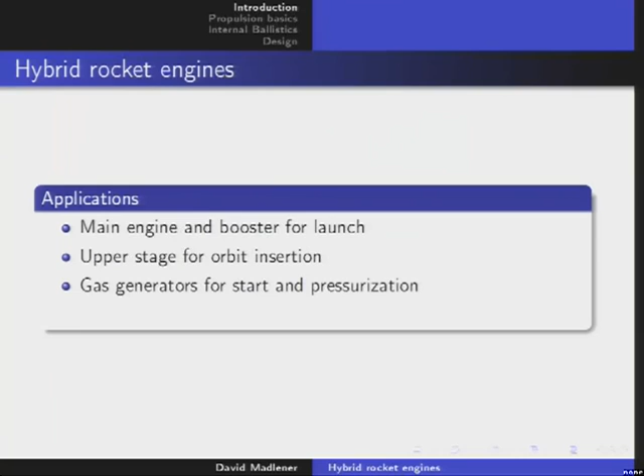So, hybrid rocket engines, what are the applications? It can be used as a main engine or booster for launch. A company named AMROC developed a working launch system in the 90s, but sadly it went bankrupt, so we never saw it flying. In principle, this is a proven technology and could be used for space launch, for upper stage, or for orbit insertion. It is often used as a gas generator, to start another engine or pressurize tanks, and sometimes even as an extinguisher. Very importantly today, in the military or for amateurs, for unmanned aerial vehicles, it is used as a sustainer engine for drones because it has very long burn time and you can throttle the engine.

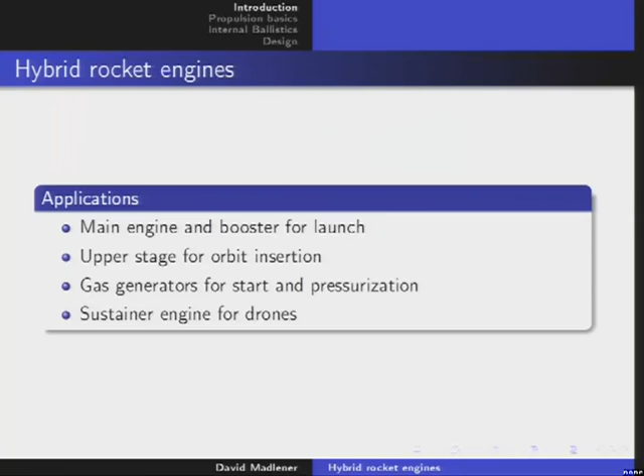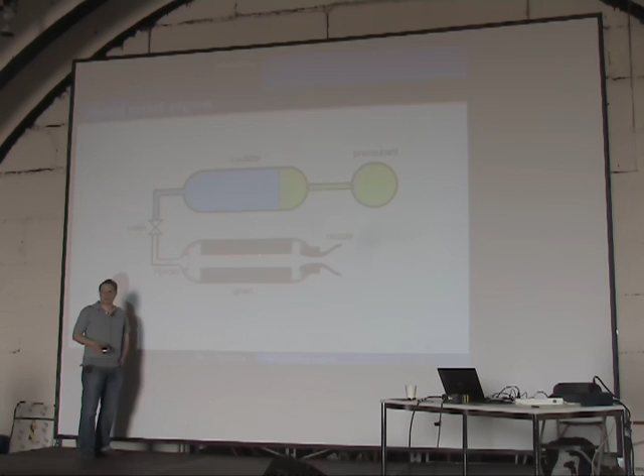The valve has to work at cryogenic temperatures if you are using cryogenic fluid, so this is the difficult part. If anybody remembers, Copenhagen Suborbitals launched their Heat 1X this summer, and last summer they tried, and this was the main problem - the valve didn't open because it was frozen. So this happened to us too.

Then we have the oxidizer container, normally a fluid like liquid oxygen or something like that, and then we have the pressurant. So if we build an engine, we have to feed the liquid into the burning chamber at a certain pressure - normally the higher the better. The problem is, of course, that you have to somehow put pressure on this liquid, and there are two ways to do that: you can use a pump, or you can pressurize it by a gas. This is very simple. If you use a pump, the pump assembly would be here, and it would be the most complex thing, so amateurs normally tend to use normal pressurization by gas.

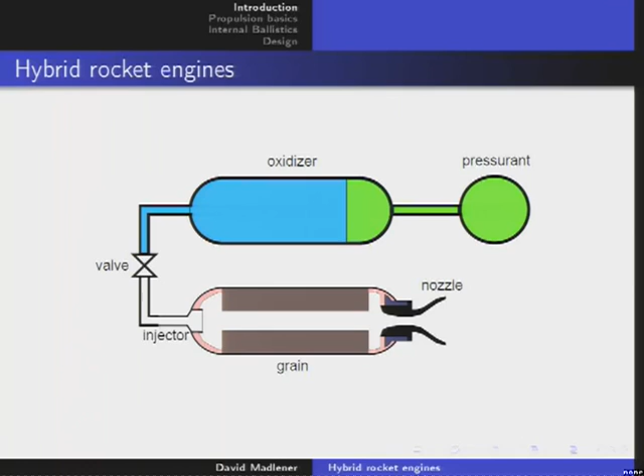Okay, that's the principle. So what are the pros of this design?

There are many pros. First, it's inherently safe - that's something really nice. Hybrid rocket engines cannot explode by itself, like, for example, solid engines, and they don't do hard starts like liquid engines, and they don't burn up in flames and devastate everything, your test stand and even people, if you use the right oxidizer.

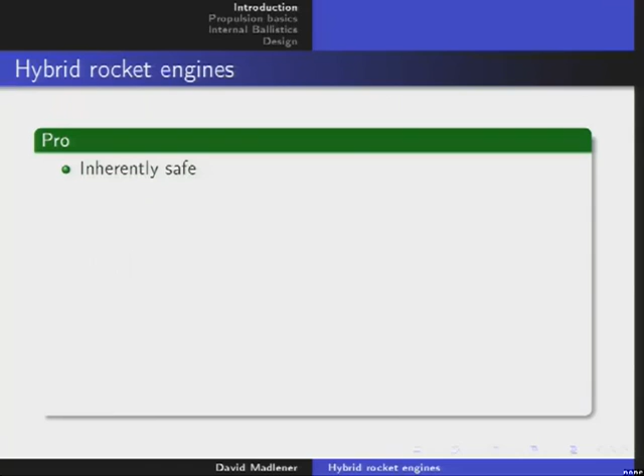There was an accident with - what's the name - Scaled Composites, where they used nitrous oxide, which is a monopropellant, and they did something wrong. There was some cavitation and it exploded, and I think 2 or 3 people died. But normally hybrids are very safe.

It's environmentally clean if you don't add any strange metals like beryllium or something like that to the mix. It's a proven technology - as I said, there were applications trying to make a launcher, and it was working. And it has been researched since the 1930s, so it's nothing new.

The grain is very robust, so it doesn't matter if there are cracks or bubbles or something inside, like for a solid rocket engine, where we have to take very much care looking at the structure of the grain, let's say with X-ray or so. In hybrid engines, the grain could have bubbles or cracks, and it doesn't even matter. So that's the feature of why it's inherently safe.

It has medium ISP, so between 150 and 300. You can go a little bit beyond that limit, but you have to use very exotic oxidizers and fuels.

It has easy throttling. You only have to throttle one liquid. As in the case of bipropellants, if you want to throttle, then you have to change 2 liquid streams. It's much more complicated than just one.

You can shut down and restart the engines. It's very easy to do, as compared to solid engines that are very difficult to restart and shut down. And it has reduced complexity and low cost compared to bipropellant engines because the feed system only has to transport one liquid, and you don't need mixing aggregators to mix the 2 propellants.

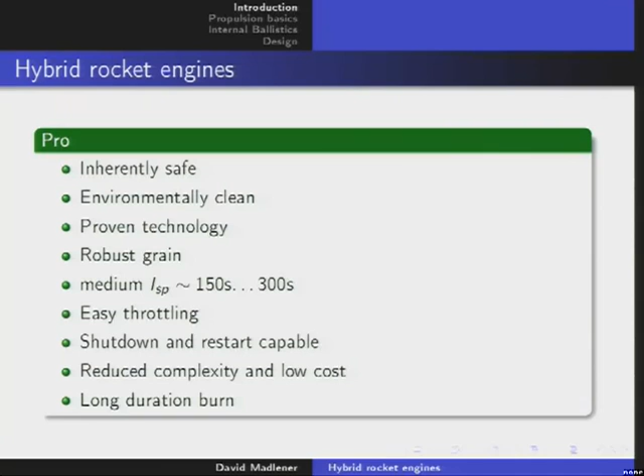So there are, of course, some drawbacks. If these drawbacks weren't there, they would be using hybrid engines now. But they don't. So why don't they use it? Well, there's one problem: low regression rates, that in turn brings the very long duration burns.

But if you don't want that, if you want a very short burning time, so a lot of thrust, then you have a problem. But you can counteract it. One way is to use multiports. The second way is to use special fuels that have a very high regression rate because they have low viscosity when they melt, like paraffin.

So there are additional effects that transport the fuel into the burning chamber.

It has low bulk density. That means that a hybrid rocket engine is normally very large. You cannot build them as small as bipropellants, maybe just that small. So they are always 1-2 meters long because they need the mixing time. That's due to the process of burning.

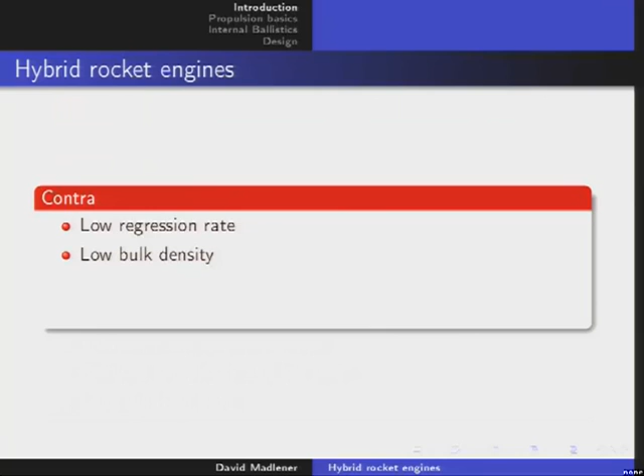And they have normally a low combustion efficiency, so a few percent below bipropellants, but they are better than solid rocket engines. So to improve the efficiency, you have to add certain mixing elements like diaphragms to make something like an afterburning by producing vorticity. And this, of course, adds additional weight to the system, so you have to build it bigger.

And another problem is the shifting O/F ratio. This is a ratio between oxidizer and fuel, because as the port increases in size, everything changes. The working point of the engine changes, and you have to counteract it by controlling. But with today's electronics, this shouldn't be a problem.

So there are some drawbacks, and they are mainly used against the hybrids. That's the real reason why they are not in use, these 4 points. So if you want to make a running system, you have to address these 4 points.

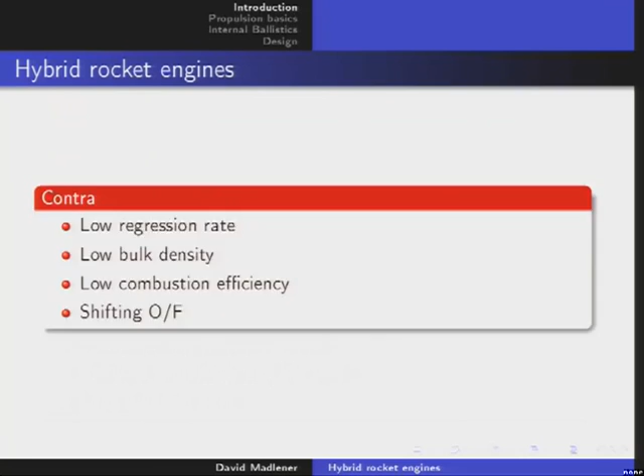So let's look at the fuels, what is used normally. You can use any polymer, but one of the first, when they were available, was just rubber, polybutadiene. Today mostly HTPB, hydroxy-terminated polybutadiene, is used, which is just a more viscous, faster burning rubber. But you could just as well use polyethylene.

We use that too. Amateurs like to use that. The problem with polyethylene is that when it melts, it expands, so it deforms and everything.

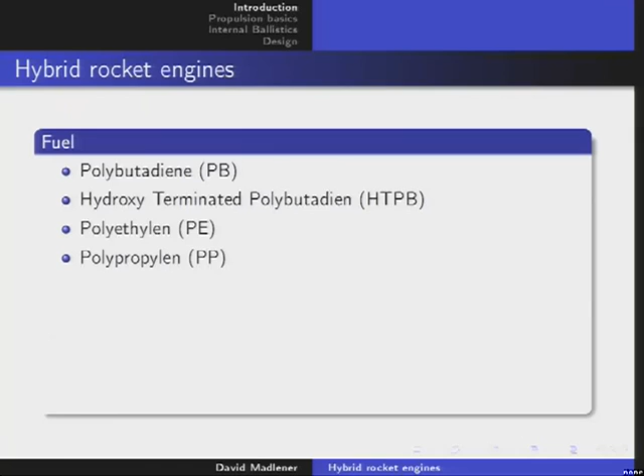Then you could, of course, use polypropylene, which is nearly the same. What's very nice is to use PMMA, polymethyl methacrylate, which is transparent, so you can watch the burn while it's working, and estimate parameters in the burning chamber just by optical inspection.

Then what we used was polyurethane, nasty stuff, but very easy to process. Then some amateurs use PVC, polyvinyl chloride, which is really nasty because it produces chlorine exhaust, but is readily available in every hardware store.

And then again, a very, very good propellant that some guys in our group investigated is paraffin, or you can use very long alkanes, asphalt for example. This has a very high regression rate, so you can get to very high thrust even using one port, reducing the complexity of the engine.

A very exotic fuel is pure lithium. There was a program in the 60s, beginning of the 70s, where they used a pure lithium grain together with FLOX, and it achieved, I think, a vacuum ISP of 380, so nearly that of a good bipropellant.

So oxidizer, what is normally used? Well, we used liquid oxygen, and it's, in my opinion, the best oxidizer there is in the world. But there are other opinions.

So you can use gaseous oxygen. Of course, this is only for test stands because the density is too low for the engine to work in a real application. Most amateurs use nitrous oxide.

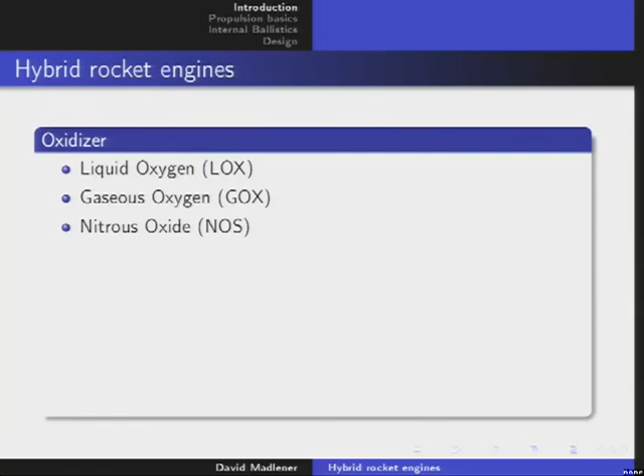Then there is a very interesting substance called red fuming nitric acid that you can only use with a bunny suit - a moon suit - otherwise you get burnt. You have to use a gas mask. But otherwise, it is a very benign substance, so it doesn't explode by itself.

It just burns everything in contact. And this one produces nitrous gases, so it's red fuming - it looks like it's directly coming from hell. And this one is not so dangerous in the sense that it doesn't produce so much fumes, but this thing corrodes everything. So you put it in anything that's not specially suited, like with Teflon or so, and it will corrode everything.

So hydrogen peroxide is a very interesting oxidizer. True - the problem with hydrogen peroxide is that it has a lower specific impulse because it produces water in the process. But it is very, very nice as a monopropellant, and there are guys that use hydrogen peroxide for hybrids.

Then there is dinitrogen tetroxide. This is normally used for military applications. It's a storable compound, a liquid gas, like nitrous oxide. It's very similar - it's just adding two agents together, and it's what makes the red fuming nitric acid red, essentially.

So then we have liquid fluorine, which is something very, very, very nasty, and you don't want to work with it, but they did. And even worse, liquid fluorine plus oxygen, called FLOX. And as I told you, this FLOX was used with lithium to produce a hybrid engine that achieved about 380 seconds in the 1970s. So there are surely a lot of other oxidizers, but these are the best.

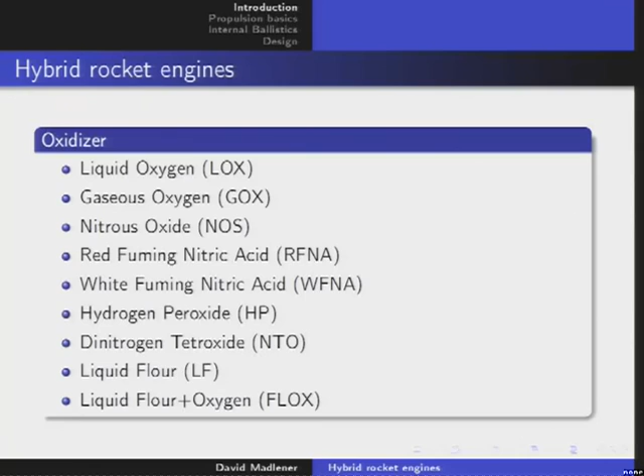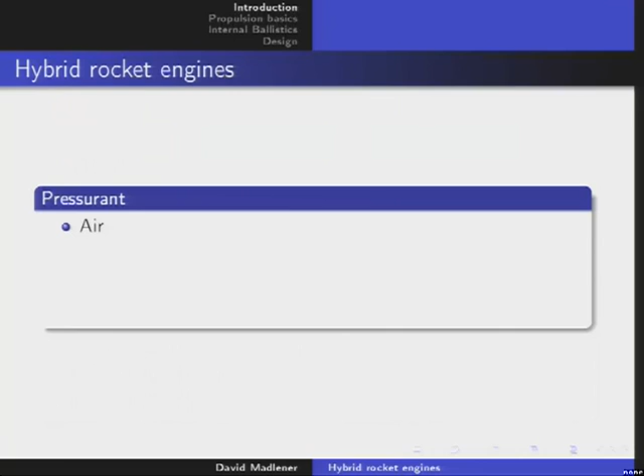Then as pressurant, there's not so much choice. Normally you can use just air, compressed air. The problem is that compressed air contains oxygen, and if you let it flow through a feed line, there can be some inhomogeneity, some crack or something like that, and you can have an adiabatic shock. At that point, it heats up and it just ignites, and then you have a nice burning facility.

So it's better to use nitrogen. It's totally inert, it's very cheap. The problem is if you work with cryogenic oxidizers like LOX, the nitrogen will go to the liquid phase, so you have to put a lot of nitrogen in it.

Then you could use helium, which is normally the best choice. The problem with helium is it's very expensive and it goes through everything, so you cannot store it for a long time. You should just buy it and use it up in a short cycle, otherwise maybe only half of the helium you bought is left.

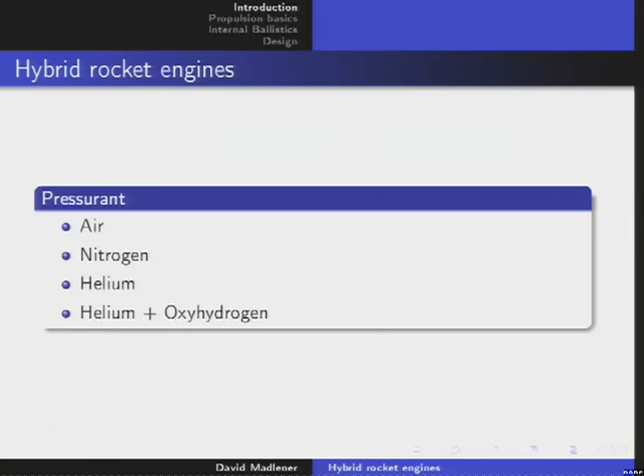And what's very interesting, there are people that use helium together with oxyhydrogen. Okay, oxyhydrogen as a pressurant is somehow crazy, yes? But there are guys in Switzerland, SPL, and they just take oxyhydrogen in a concentration that isn't explosive, so very low concentration, and then they take the helium and expand it through a catalyzer with the oxyhydrogen, so this reaction takes place, produces water and a lot of heat, so the helium is heated and you need less helium than just pressurizing it with room temperature helium.

Okay, so let's talk about the grains. Normally you just use a circular port. This is the simplest port, just a hole, and it's like an inverse flame inside, like a candle, but burning from inside instead of using some string.

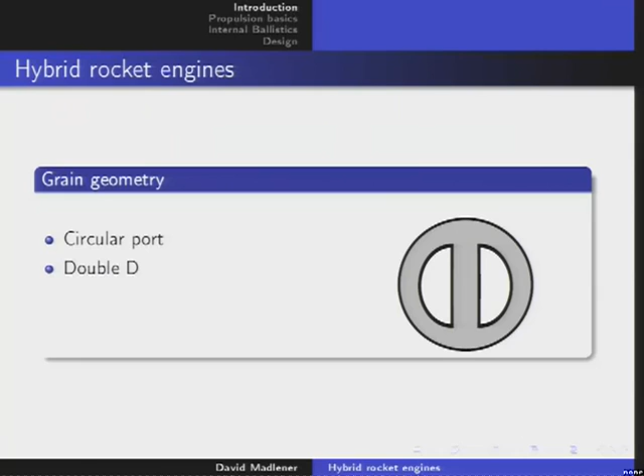And then this is the double port design, typical, so the double D. If you want to have higher thrust, you have to add ports - of course this makes the injector more complicated. And then the 4-port, and of course the so-called wagon wheel.

This was the design AMROC used for their launching vehicle. The problem with these wagon wheels is when they burn up, of course these hollow regions expand until they touch, and then you are left with a web. At this point, you have to shut off the engine, otherwise the web itself will start to deteriorate, to burn up.

Small pieces will go to your nozzle at a speed of approximately Mach 1, about 1,000 meters per second, and will destroy the throat of the nozzle, thereby changing the flow and the working point, deviating the rocket. So this is not a nice thing to try. These are the problems you have if you use fuel webs for multi-ports.

So now let's talk a little bit about propulsion basics. This is very basic stuff, and some of you may have heard it already.

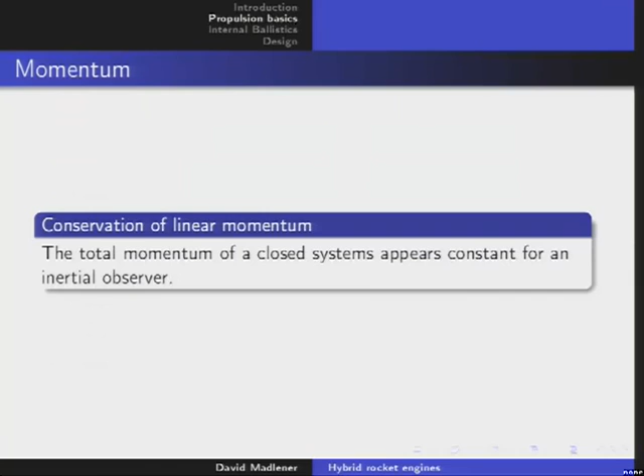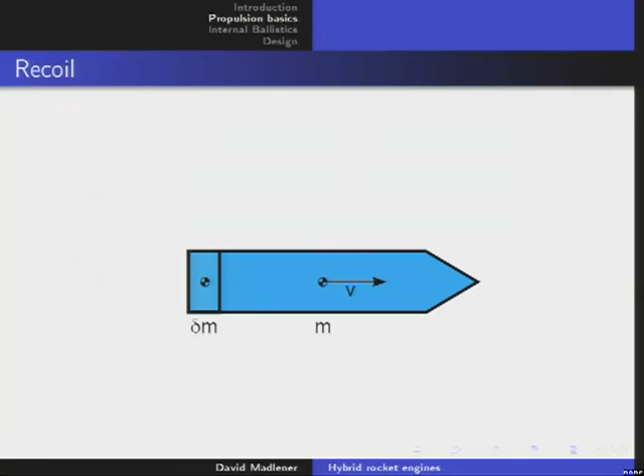When we look at a rocket, what we really use every time is the so-called conservation of linear momentum. For an inertial observer looking at a system where no external forces are working, this system has constant momentum. If you look at a rocket in flight with velocity v, and we have two masses, the mass of the rocket and some small mass delta m ejected in a short time frame delta t, then the momentum before the ejection and after the ejection has to be equal.

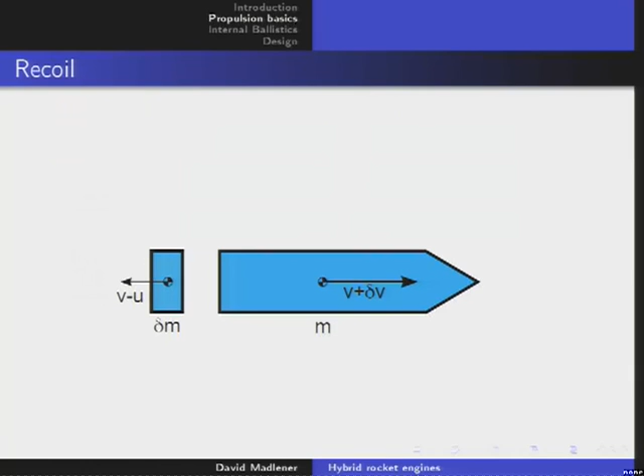So you can write down a little equation. On the left side you have the momentum before the ejection, and on the right side the momentum after. If you look at it rightly, you get to this little equation. You divide it by the time needed, delta t, and then integrate it. On the right side, we have the time derivative of velocity integrated, which gives us the difference in velocity between the start and end of the burn.

Here we have something more difficult - this is the so-called logarithmic derivation. When we integrate, we get the natural logarithm in front, and we arrive at the celebrated Tsiolkovsky formula, which is the most important formula for mission planning.

For every mission you want to accomplish, there's a certain change in velocity the rocket has to achieve to perform the mission, and it's called delta V. As Tsiolkovsky found out in the 1800s-1900s, delta V is proportional to the so-called effective exhaust velocity - the velocity at which you propel the fuel, the burn gases, out of the rocket behind you. And then there's the natural logarithm of the mass ratio.

So the idea is first to propel the exhaust gases as fast as possible away from the rocket, and the second thing is, at the end of the burn, to be as light as possible, so you get a very high mass ratio.

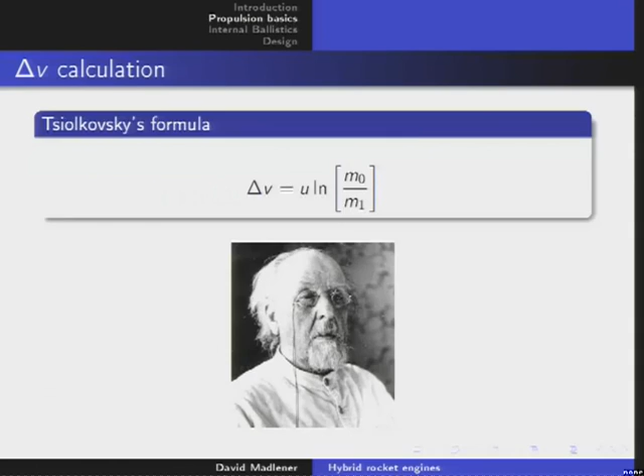Okay, let's look at delta V's. If you don't know about delta V's - where we want to go is to space. So we are on Earth, and the first thing to go is always low Earth orbit. We need a lot of delta V to go there, about 9 to 10 kilometers per second. Knowing the effective exhaust velocity of rocket engines is in the order of 2 to 4 kilometers per second, you have to achieve a very high mass ratio to get to this 10.

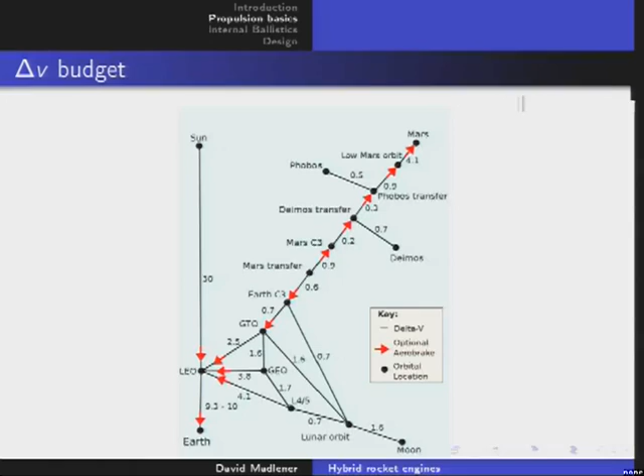Once you are in low Earth orbit, all the numbers are much, much smaller. For example, if you want to go to the moon through a geotransfer orbit, you need 2.5 kilometers per second, and then again from GTO to lunar orbit, 1.6 - so in total, 4.1 kilometers per second. So the rest of the way to the moon, the remaining 380,000 kilometers, only needs less than half of the delta V you needed just to get to 150, 200 kilometers.

So this first step is always crucial. The rest is easier to achieve. Once you are in lunar orbit, you can descend to the moon with 1.6 kilometers per second, which is very moderate - you can do it with a solid engine even.

Then if you want to go up from the moon, 1.6, and let's say we want to go to Mars, we need about 3 to 4 kilometers per second - the rest could be done by aerobraking. So to go from the moon to Mars is about 1/3 cheaper than going from Earth just to low Earth orbit. So it would be logical to first build a moon base, construct the spaceship there, and then go to Mars. It would be much faster, and the ship could be much bigger and carry much more. And of course, they're planning on it.

The Chinese, hopefully. So this is the major idea they had. It's called staging, looking at these delta V's.

You can calculate this just with very simple algebra, what you need from the masses of the planets and the moon. And if you look at your normal exhaust velocity, you see that normally you cannot reach the mass ratio necessary of about 100 or so to go to the moon.

So it would not be possible to build one stage rockets to go to the moon. But by staging them, like in the Saturn V project, you can just effectively add the logarithms, and you get at least the mass ratio of the end configuration compared to the start configuration.

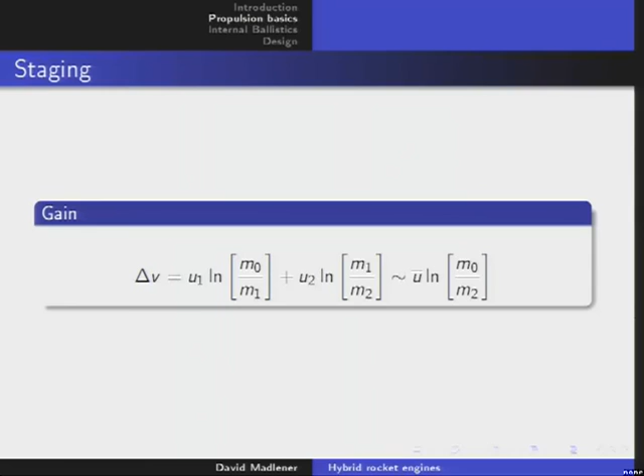Okay, let's talk a little bit of thermodynamics. This is necessary because I want to show you some formulas that contain a lot of signs that are very difficult to understand if you haven't seen them anywhere else.

So there are two laws in thermodynamics. The first law is you can't win. And the second law is you shouldn't even try.

So the first law is about the inner energy that can only change by adding heat to a system or work, or extracting it to reduce the inner energy. And the second law states there is some strange state variable called the entropy, and it's somehow connected to the heat flow at reversible process.

Okay, so energy and temperature. You may have heard about the Boltzmann constant. Every physicist knows about it. It's a very small number, 10 to the power of minus 23.

And what it essentially says is, if you have a molecule or an atom at a certain temperature, let's say at 300 Kelvin, room temperature, then you can calculate with this constant the mean energy per degree of freedom.

So degree of freedom means the way a molecule can move, let's say in direction of X or Y or Z, or it can rotate around an axis. So for example, for a diatomic molecule, you would have 5 degrees of freedom. So you could calculate that one single molecule would have in the mean 5/2 kBT.

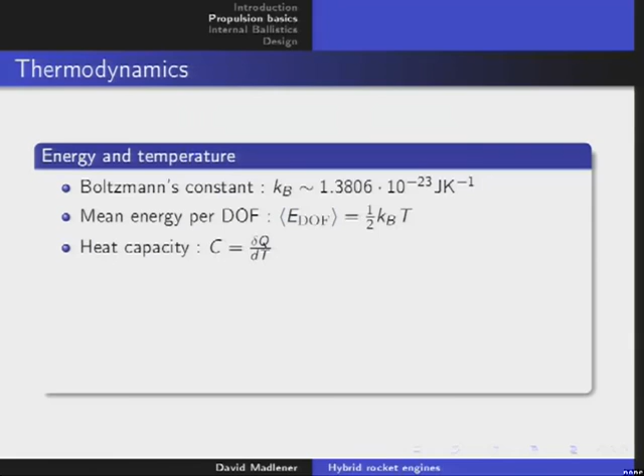So then there's another notion, very important: heat capacity. This is just if you take any system, let's say this glass of water, and you want to improve its temperature, then you have to put some energy in it. And the heat capacity just says how many joules you have to put in to increase the temperature by 1 Kelvin. That's heat capacity.

So if you do it by constant volume, like for example doing it in a cylinder, then it's the heat capacity at constant volume. There's a very nice entity called enthalpy, which is just a Legendre transform of the inner energy, and this leads us to the heat capacity at constant pressure.

So this is something that normally takes place in our environment. If you heat something, it always happens at ambient pressure, at air pressure, so it's a constant pressure. So what you normally measure is the heat capacity at constant pressure.

And there is something that's called the adiabatic index, gamma, or sometimes called kappa in the formulas, and it's just a ratio of these two heats. And it's a number that is close to 1, always a little bit higher, so between 1 and 1.666.

So this is a number that is always used in rocketry equations. Don't be alarmed, it's a very simple number to understand. It's just some small number between 1 and 1.666 that describes the constituents of the gas that is exhausted.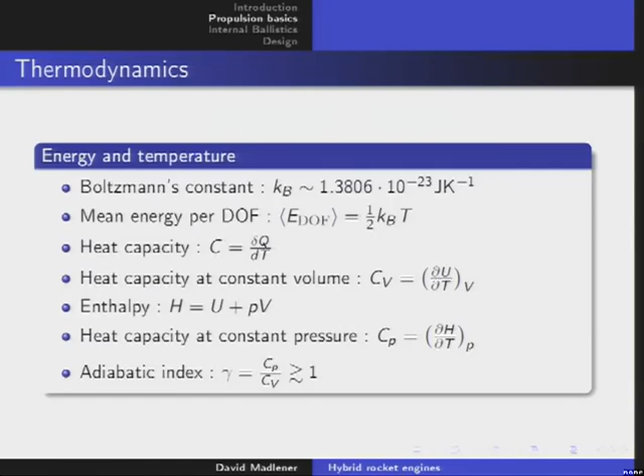So now some chemistry, molar and specific quantities. There's Avogadro's number, which is just the chemist's way of saying a dozen. Yes, a dozen is a small number, 12, and Avogadro's number is just a larger number, but it has to do with 12, because per definition, the Avogadro number is the number of atoms in the isotope C12 if you have 12 grams of it.

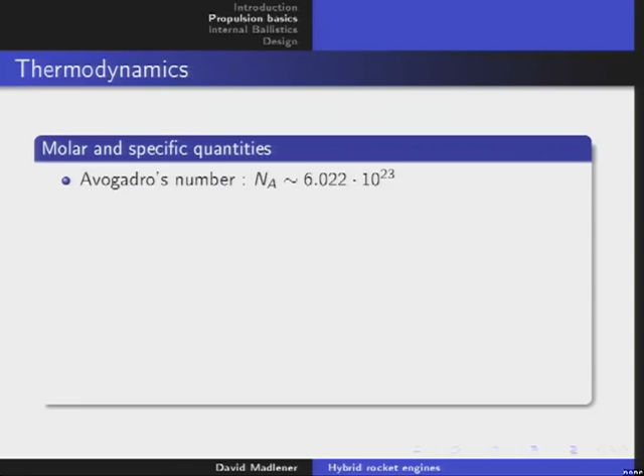Very funny. So this is the number, very, very high, and if you multiply our Boltzmann constant that has nearly the same order of magnitude, just in the reverse order, you get to a small number, about 8, and we call that the universal gas constant. So just remember, R is in the vicinity of 8.

Then we have the amount of substance, just taking all the molecules and dividing it by this number. Instead of saying I have 12 times 10 to the power of 23 molecules, you say I have 2 moles, just like when you have 24 eggs, you say I have 2 dozen.

Then you have the molecular weight, very important for the formulas that will come. It's just the weight that 1 mole of the substance has. You take 1 molecule, look at its weight, multiply it with Avogadro's number, and you get some number in the region of grams. For example, water, made of oxygen and 2 hydrogens, is 16 plus 2, so 18 grams per mole. So if you have 18 grams of water, there are about 6 times 10 to the power of 23 molecules in it.

So the molar concentration is just how many moles in a liter, then the number concentration is how many molecules in a liter, the mass density is how many mass per liter, and the specific heat capacity is just taking the heat capacity of the system and dividing it by its mass.

Okay, so then something very important, the so-called velocity of sound. It's a very simple formula, and here we see for the first time the adiabatic index. For example, if you want to calculate the velocity of sound in air, you put in the temperature we have now, let's say around 300 Kelvin, divide by the molar mass of air, which is in the order of 28 grams or so, multiply it by gamma of air, which is in the order of 1.4, multiply it with 8.314, and take the square root, and you get about 340 meters per second.

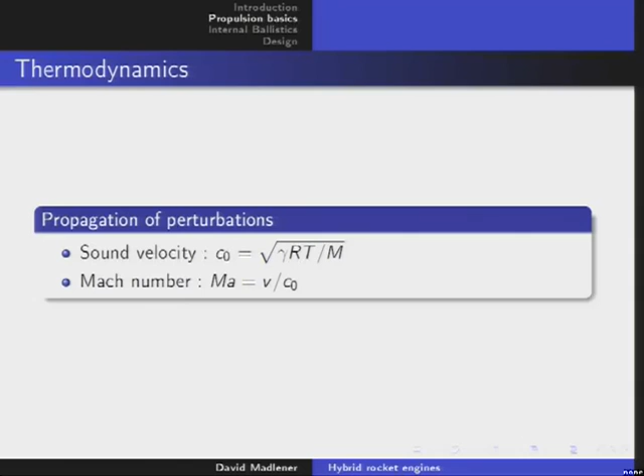Okay, let's talk about the ideal gas. I have a nice metaphor for it. Just imagine that you have n hooligans, and they are confined to a space V, and you make them angry with a temperature T.

Then they will exert a pressure on the environment. You can divide it by V to get the number density of the hooligans, or divide it by Avogadro's number to get something chemists like, the molarity, or divide by V to get the molar concentration.

What is normally used in rocketry is this equation. If you come around this equation, it's always the ideal gas, all the same. In this case, it's the density rho, and the molecular weight m is now introduced.

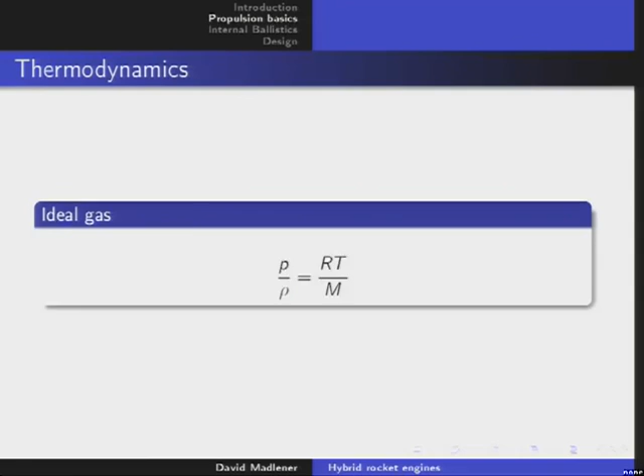So what are the properties of ideal gases? Well, we can calculate the adiabatic index because it's just given by the number of degrees of freedom plus 2, divided by the number of degrees of freedom. So if you have, for example, a diatomic gas, like in air, nitrogen and oxygen mostly, then the number of degrees of freedom is 5, 3 for translation and 2 for rotation. So 5 plus 2 is 7, divided by 5 is 1.4. It's that easy for an ideal gas.

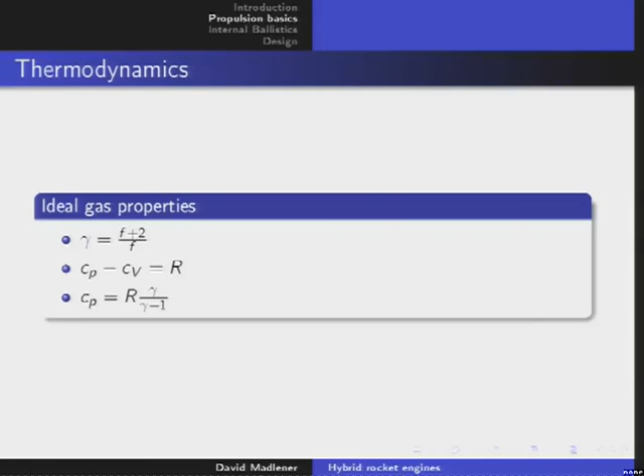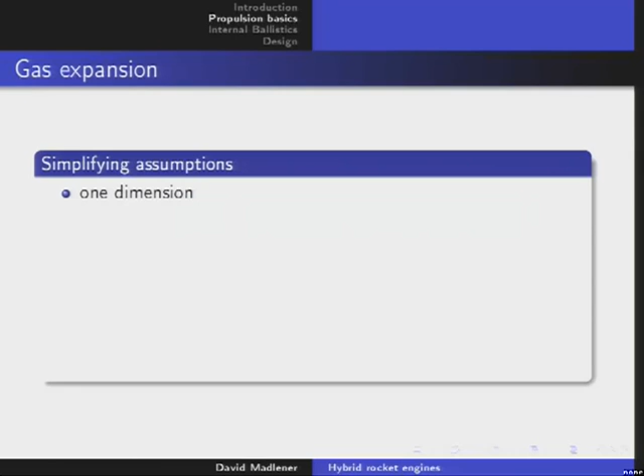Then the difference between the two heats at constant pressure and constant volume is just R, 8.314. And you can even directly calculate Cp. That's very important because if we do gas expansion, which we're interested in with the nozzle, we can simplify things and get exact analytical expressions that we can just calculate to get the properties of the engine.

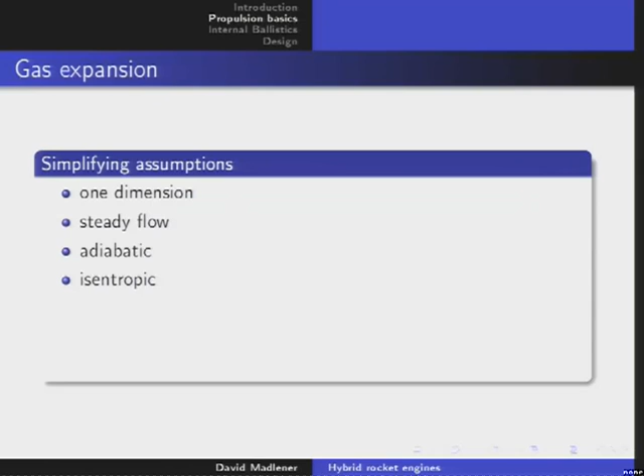So the simplifying assumptions are one-dimensional flow, steady flow with no change over time, adiabatic (no flow of heat), isentropic, and ideal gas. It's done only with volume work, so the gas expands and works against the environment, and there are no significant changes in potential energy because our engines are normally so small that they are negligible.

So if you have, for example, a foil, you could calculate the temperature at the stagnation point, or more interesting, for rockets, you can calculate the temperature at the tip of the rocket. You can see if V gets very high, let's say Mach 3 or higher, its temperature goes beyond 500 Kelvin, 600, 700, 800 Kelvin - so you cannot build tips out of, for example, aluminum. It will just melt away, okay?

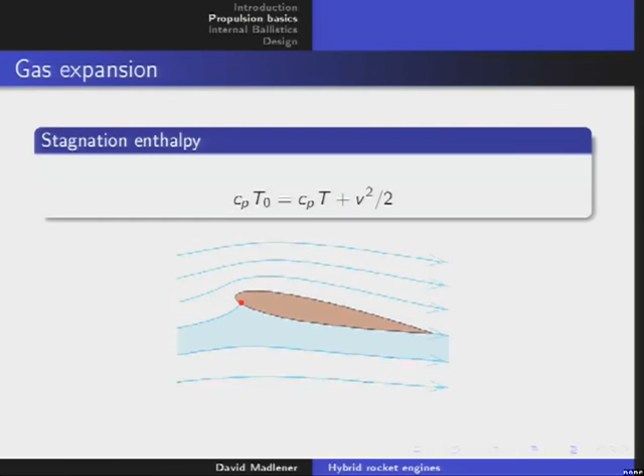So now, to the so-called de Laval nozzle, the convergent-divergent nozzle. This is the one piece of engineering that produces the most power on Earth. With this simple device, every normal power plant produces electricity, okay? By expanding hot steam to very high speeds, you turn the turbine and then you produce electricity. And of course, it is used in rockets, and as you may know, rockets are the most sophisticated and most powerful engines ever built.

So what happens is that hot gas enters the convergent section, then it speeds up, and exactly at the throat, it reaches Mach 1, the local velocity of sound. After exiting the throat region, it even accelerates more and achieves supersonic velocity, maybe Mach 4 or 5 or so. And you have the effective acceleration of the gas.

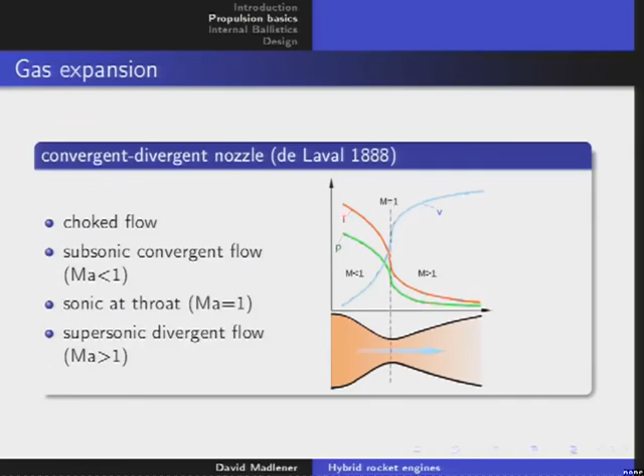So the thrust itself is now calculated from two terms. The first term, m-dot times Ve, is the outflow, the rate at which momentum is exchanged by pushing away the mass, the propellant, the gases. And the second term is due to the ambient pressure and the pressure at the exit of the nozzle - that's the difference, delta P, times the area of the exit of the nozzle. This is an additional term that cannot be omitted.

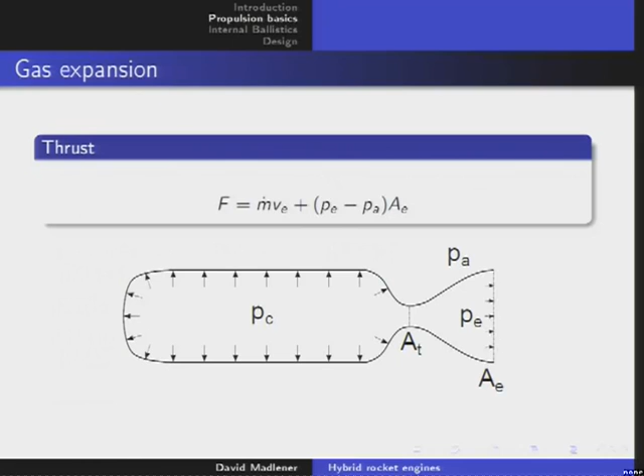And this term effectively changes the velocity of the gas from the exit to infinity. It may decelerate it or accelerate it depending on the pressures. So if the ambient pressure is higher than the nozzle exit pressure, what is normally the case at ground when you are testing, then the gases will be decelerated because they have to work against the ambient pressure. But if you are in space and vacuum, then they will accelerate, with the atoms pushing it forward, in a sense, without any nozzle walls to lead them.

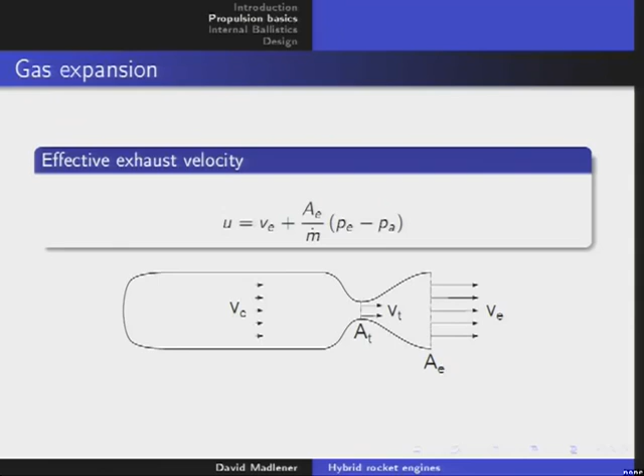So then, just by dividing by m-dot, you can calculate the effective exhaust velocity that we had in our Tsiolkovsky equation. Very importantly, with this effective exhaust velocity, you can calculate the specific impulse of the engine, the one number that defines how efficient the engine can accelerate the gas. It's measured in seconds, and it's normally in a range between 100 and 450 for the best engines.

So this is actually an equation from around 1850 or so, very old. It just describes the exit velocity depending on the stagnation temperature, the molecular weight of the gas, the universal gas constant, the adiabatic index, the pressure in the chamber, and the exit pressure at the nozzle. If you just enter everything, you get the velocity at the exit of the nozzle. And if you look at this formula, you see that it's proportional to the local speed of sound in the burning chamber - so the higher the speed of sound in the burning chamber, the better.

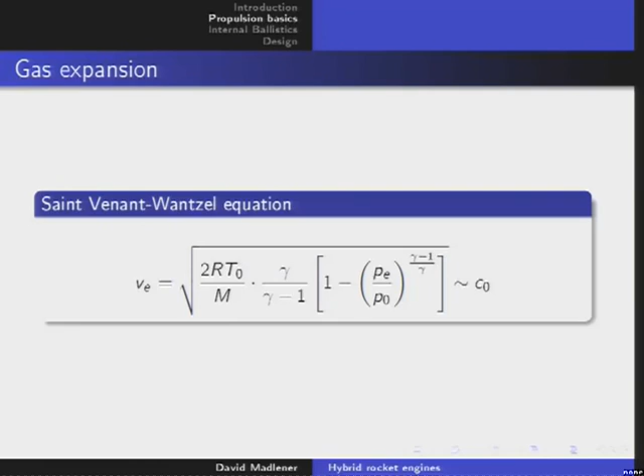So if you enter everything, you get this nice equation - I won't go into the details, this is just the thrust equation. You take this formula, put everything in, and you have an estimation of what the thrust of your engine will be. This is important, as we will see soon, that you know the thrust before testing.

Let's talk a little bit about hybrid combustion. The main feature of hybrids is the so-called diffusion flame. In solid fuel engines, the two propellants, oxidizer and fuel, are mixed so intimately that they directly react at the burning front, so there is normally not much reaction in the gas phase, except if we have metals. In bipropellant engines, you mix the two propellants by impinging them or something like that, and then they burn up in little droplets in flight.

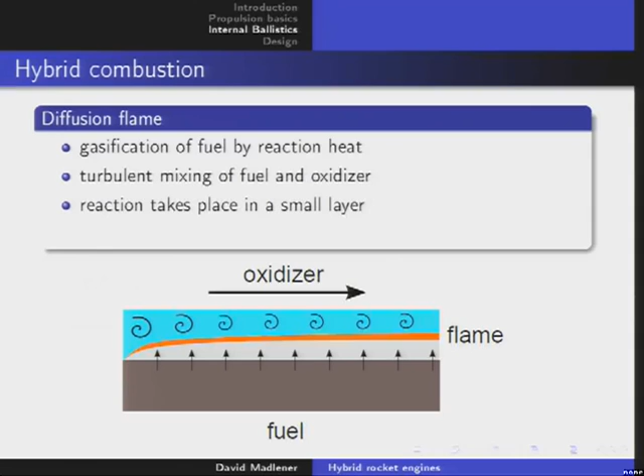In hybrid combustion, you have a diffusion flame, meaning the fuel is gasified during the reaction, and you have turbulent mixing between the two layers. This is fuel-rich, this is oxidizer-rich, and this is the flame front, so you have mixing between them. You have fuel blowing away from the wall, and due to the very high velocity of the oxidizer, you normally have a very high Reynolds number, so it's a turbulent flow, hopefully. The reaction takes place in a very small layer, the flame layer, where the two have the correct stoichiometric ratios - it's nature's way of burning things. If you look at a candle, you are looking at a diffusion flame. It's just the same thing in principle.

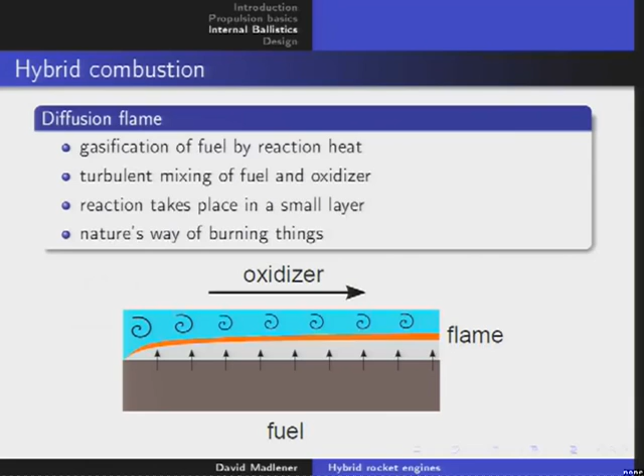Now to the burning rate, which is the dominating parameter to estimate the thrust. You have heat flowing from the flame front down to the fuel - we call it Q-dot for the wall, the heat that flows into the wall from the flame. On the right side of the equation, we have the amount of fuel that evaporates per second times its enthalpy of evaporation. So there's a certain kind of energy needed to transfer the fuel from the solid phase to a gaseous phase, or mainly first to a liquid phase and then to a gaseous phase.

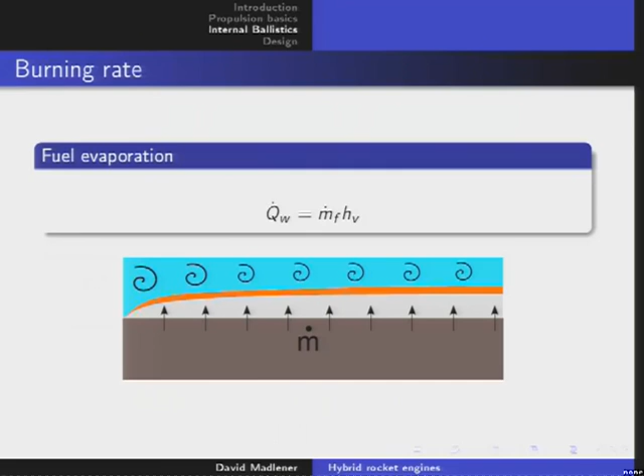This is the main feature why hybrids are inherently safe. Because if anything goes wrong, normally the pressure in the chamber drops, the flame goes out, and no more propellant will be evaporated. There is no intimate mixing of oxidizer and propellant possible like in bipropellant engines, where if there's some fault and these two things get together - like kerosene or hydrogen with LOX - then there's a very nice fireball, but only to watch from far away. If you're standing near it, that's it. But with hybrid engines, they may blow up, but then it's over - there will be no explosion.

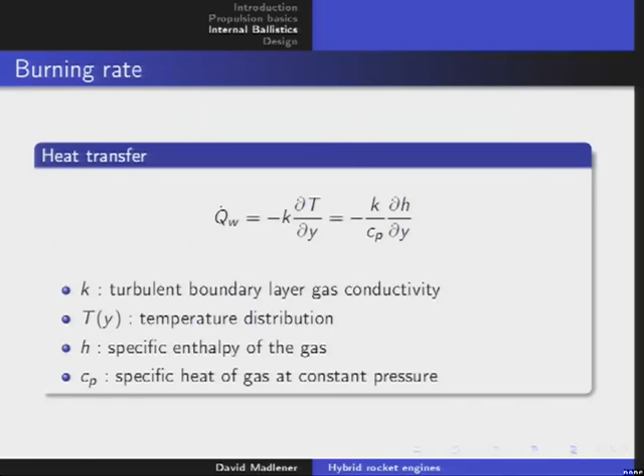The heat transfer is calculated by this equation, and it's very complicated - I won't go into the details. You have to look at the turbulent boundary layer, gas conductivity, the temperature distribution across the burning chamber. You have to know the specific enthalpy of the gas, so you have to do some thermochemistry to know what the combustion looks like, and of course you need the specific heat of these burning gases.

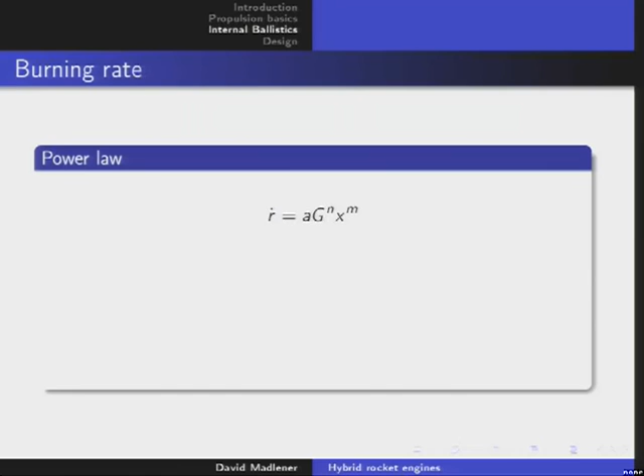When you do all that, you get this equation that describes how the burn rate goes. R-dot is the amount of length that the grain loses per second, so some millimeters per second, and it is calculated by a power law containing a regression coefficient. G is the total propellant mass flux rate along the port, and X is the distance along the port. So you need two exponents, n and m, on the order of 0.8 for n and minus 0.2 for m.

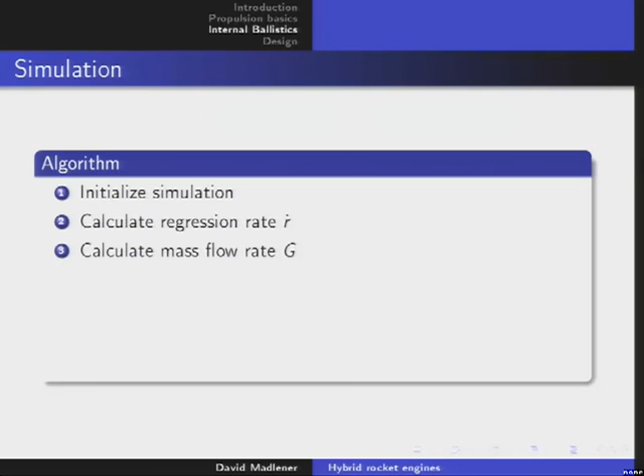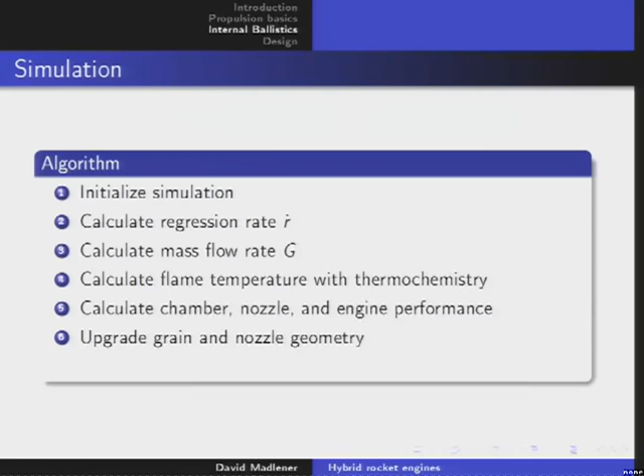Then you can simulate it - you initialize the simulation and calculate the regression rate with this formula. Then you calculate the mass flow rate by knowing how much oxidizer and fuel is now in the burning chamber. Then you calculate the temperature using thermochemistry, and from that calculate the change in the chamber, nozzle, and engine performance. And as you update, the grain is slightly changing, the port diameter is increasing, and the nozzle may be increasing too, because of ablation.

And if not all fuel has been spent, you just start over, and you repeat it until you have done the simulation. So that's how a simulation of a hybrid rocket motor is done.

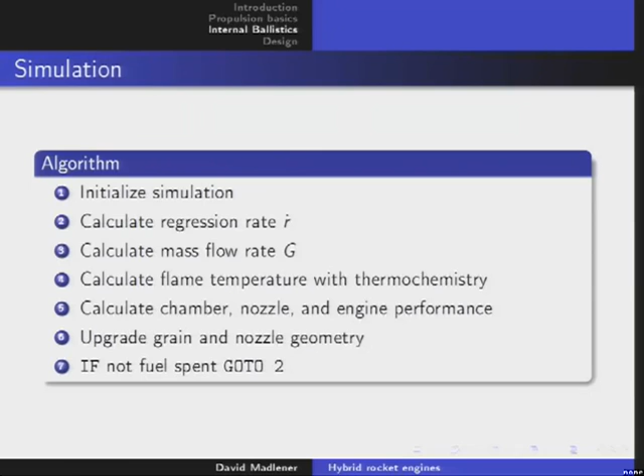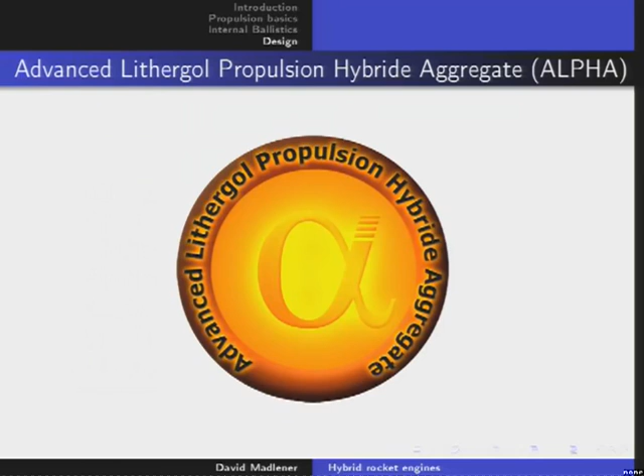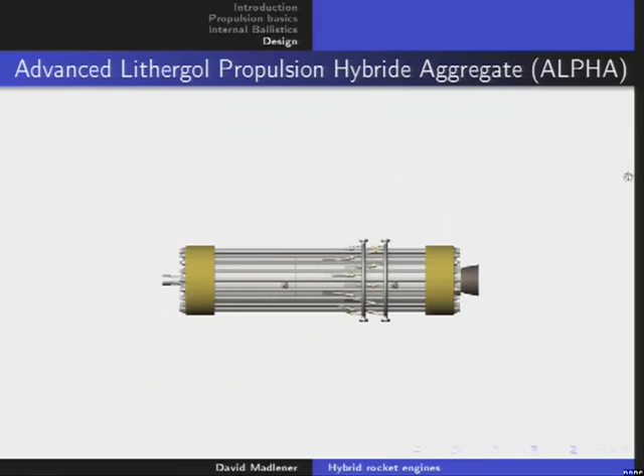Side view, view to the nozzle. This is the injector part, and this is the decomposition. We wanted to make it modular, so we could change everything between tests. This is the inner view, though it's not very visible, the contrast is very bad. Here's an aft-burning chamber, but you can't see anything. It's a problem, sorry about that.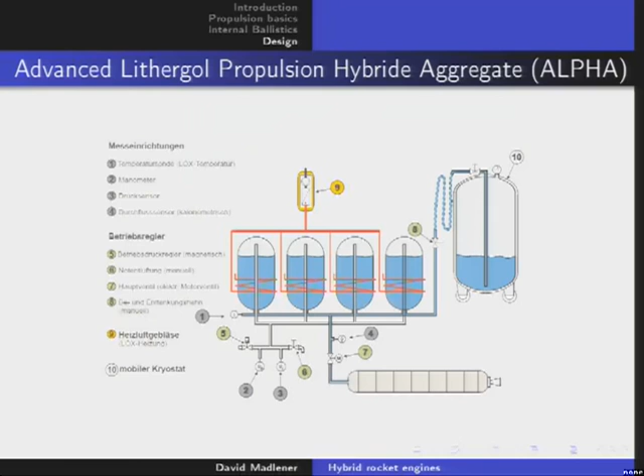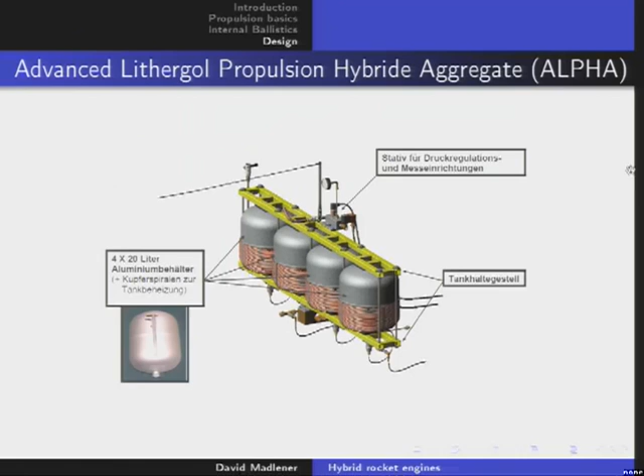So this is a view of the 4 tanks. These are made of aluminum, and you have copper tubes that transport the hot air to boil the oxygen. And this is a view with all the sensors integrated in this tank assembly.

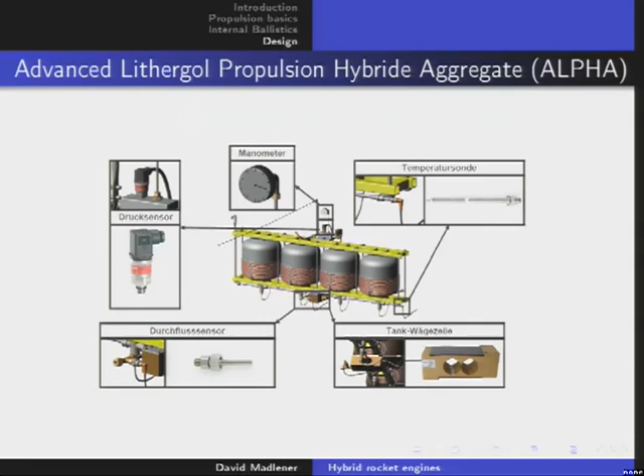So of course we did some additional design. This is a vision — we never worked on it, but it would increase the bulk density, so you could make more compact hybrid engines. We call it the Onion. It's basically a torus with an aerospike.

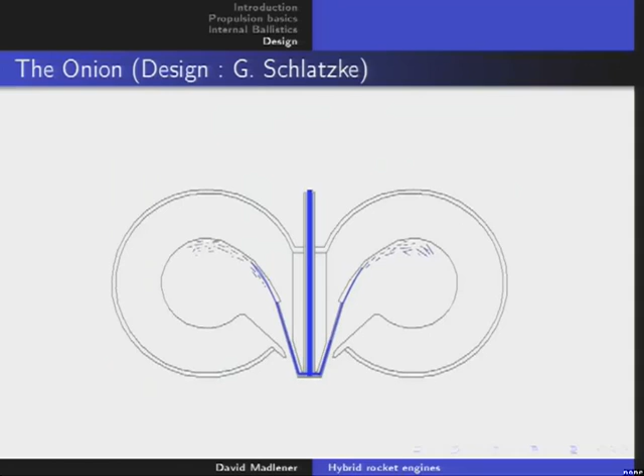So the liquid oxygen, or whatever oxidizer you choose, goes down first to the aerospike, cools it, and is then injected as a liquid into the torus, circulating around. This is how it would look: you'd have a tank assembly above, then it would go through a valve, inject here, and there would be a burn.

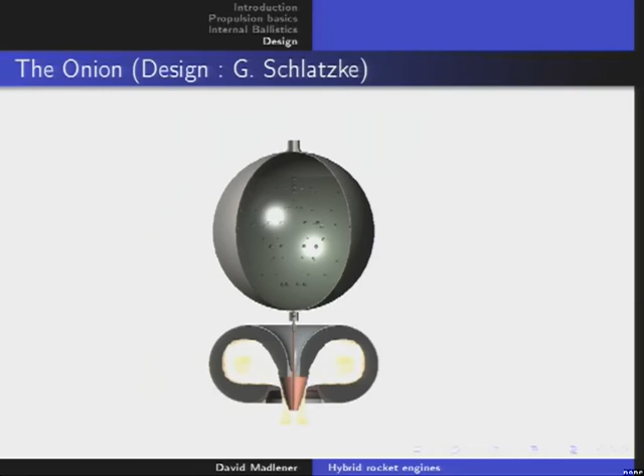This is a close-up of the aerospike during burn. We have here very nice vorticity that would hopefully increase burning efficiency — we don't know, we didn't test it — but it would increase combustion efficiency.

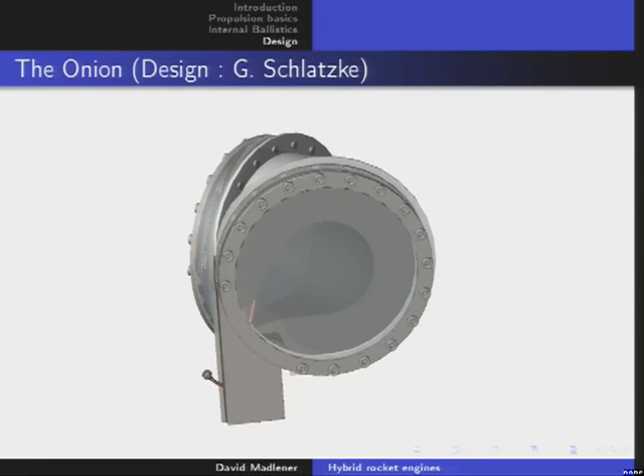This is a possible way to make a smaller engine and inspect the burning before building a really large engine, because the engine you just saw would have about 80 kilograms of fuel and would spend over 300 kilograms of LOX at once.

So now, before I end this session, I want to show you some videos of some tests we made.

Okay, videos. So at first... okay. Nice, it's not working very well. Do you have any sound? Wait a second, I will open it with another one. Sorry about the delay, yeah, it's difficult, I know. Yeah, okay, I will make full screen.

So this is a typical assembly we do. This bubble here is a LOX tank, and you have the valve below here. This is the tanking, for tanking, and this is the engine. It has all started, so we'll see how it goes.

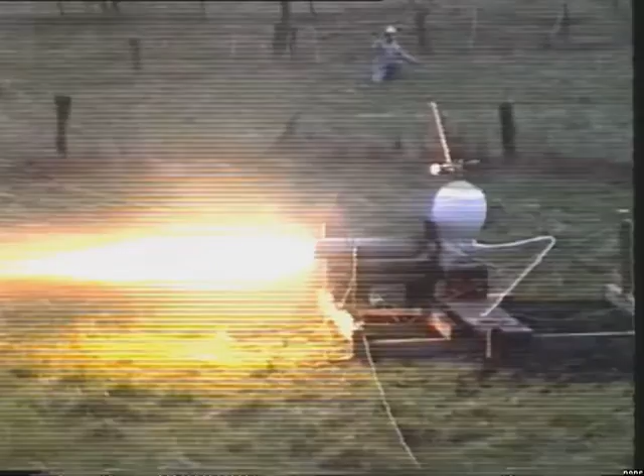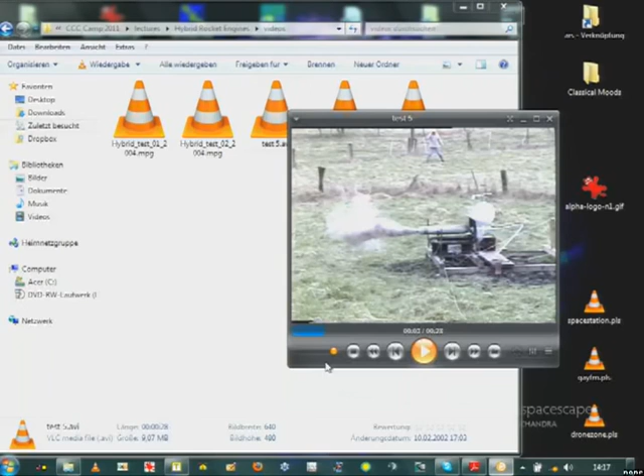Okay, but you haven't seen anything yet, wait a moment. So this is a typical scenario when something goes wrong with a hybrid — it blows up, but then it stops. Okay, then it's over, and that is why we had this shield there. We had anticipated problems because one test before something similar happened, but not that brutal.

And there was another test that was not so bad — went quite smoothly. We used a graphite nozzle for the second time, but our injection system failed again, in another way, as you will now see. The LOX just burnt a hole through the hull, and the moment the pressure went out of the chamber, the reaction stopped and everything was safe.

So let's look at this test here — this is my favorite, this is my favorite. You have to hear the birds before it starts. Very nice, very peaceful. It was 10 years ago.

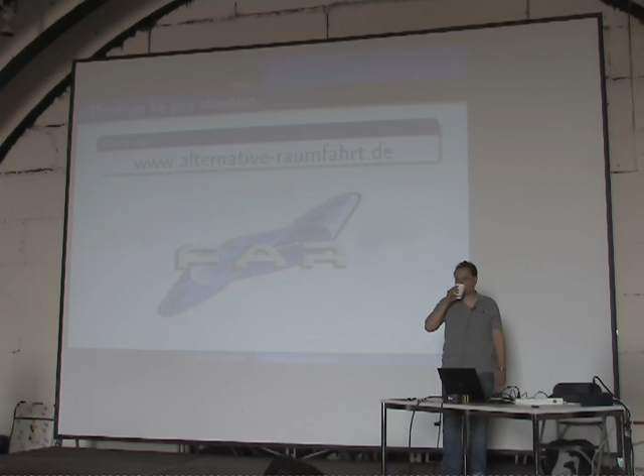How do you ignite the hybrid engines, and can you do it several times? Like, can you turn the machine on and off?

Our design was focused on making the injector work, because we tried to make an injector that improved the turbulence inside the burning chamber without adding additional mass, so without adding a diaphragm. So we didn't concentrate so much on the igniter. We just used some pyrotechnic device that first started it.

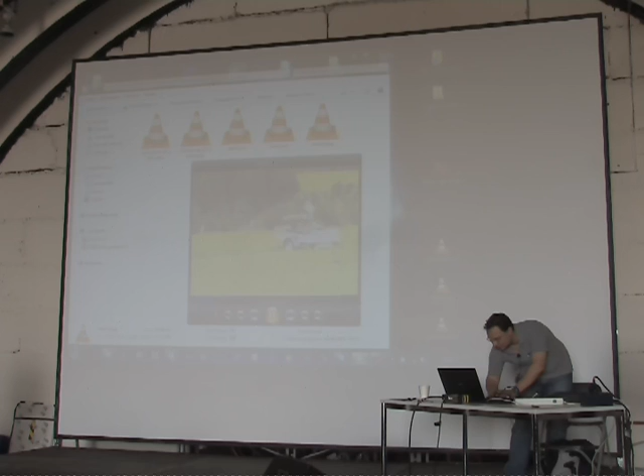I can show you in one of the movies. So there are groups that did propane gas burners to make it restartable. I don't know exactly what they did, but it was successful.

So at this point, the pyrotechnic has ignited, and there's some oxygen flowing from the tank through the hybrid, because the valve wasn't exactly sealed. It was to our advantage, because then the hybrid engine is really hot and warm when the main LOX comes in. And as you may notice, above the LOX tank there is a small puff. This is a device to increase energy input to the LOX tank, so the pressure doesn't go down so fast, okay? But this has nothing to do with the ignition process.

So we just fired it once and just let it burn. We didn't do reignition, but it would be possible in principle.

Okay, second question. I would like to know how well these rockets scale. I guess your aim is space, and what we've seen so far is quite small rockets.

Yes, yes, you're totally right. This one developed a thrust of 160 kilopond plus when it toppled over, but the other rockets developed between 40 and 60 kilopond. So they were not really big engines.

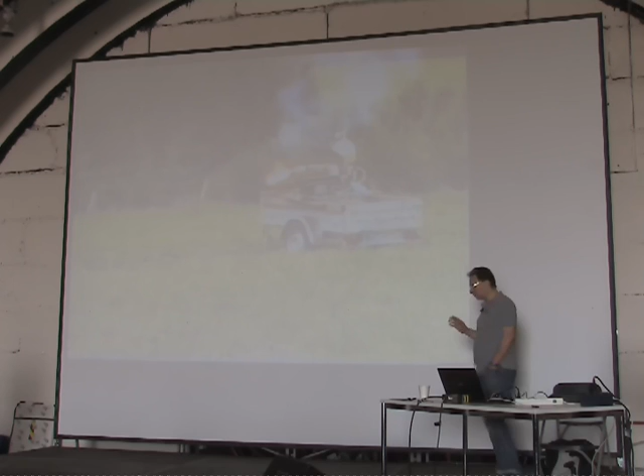The problem with hybrid rocket engines is that they don't scale so well. This is due to the scaling in hydrodynamics with Reynolds number and so on. You really have to take the real size to get it running. So you have to really build a big engine and then test it on a big engine. You cannot build a small engine and then hope that it will behave the same as a big engine.

That's true. So we will be going in the next years, I hope, to larger engines. Now we have the possibilities to do that, and we will see. We have working designs from AMROC - they are really, really large. So we know what to do in principle, but we have to test, of course. No other way.

We worked at the time on a hybrid rocket called Hera from a colleague, but he just abandoned the project. Since then we have only used solid rocket engines because it's just simpler to do, just to go up in the air.

The problem is if you just want to go up, let's say 10 kilometers, like we can do with the Arguna 4, then the hybrid rocket engine has absolutely no advantage. It has the advantage when you really want to go into space, that is 100 kilometers plus. So for low altitude flights, it is not really an alternative, except if you're making UAVs.

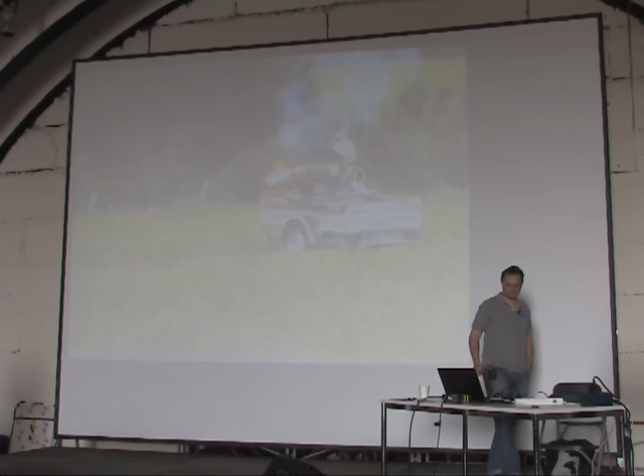Okay, so we learned today how to build safe rockets. Also, I wouldn't tag it with safe for trying it at home. So thank you very much for this presentation.